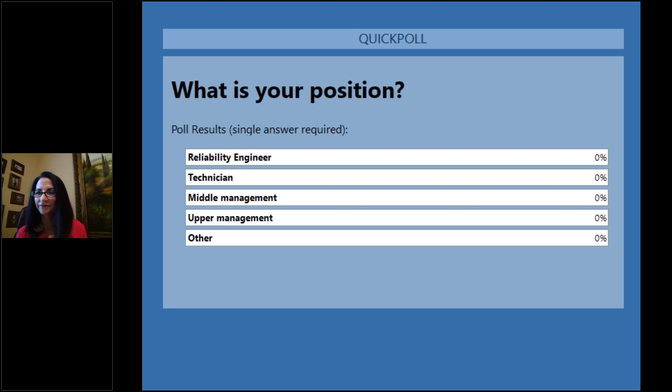And I'm going to share with you one of my other passions other than just reliability-centered maintenance. So I was in Tunica, Mississippi, and I was playing in a no-limit Texas Hold'em poker tournament.

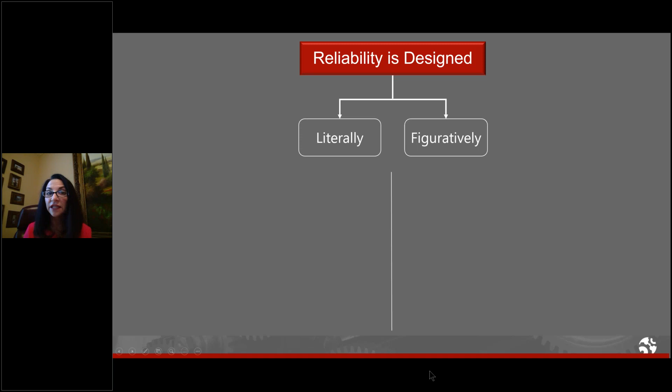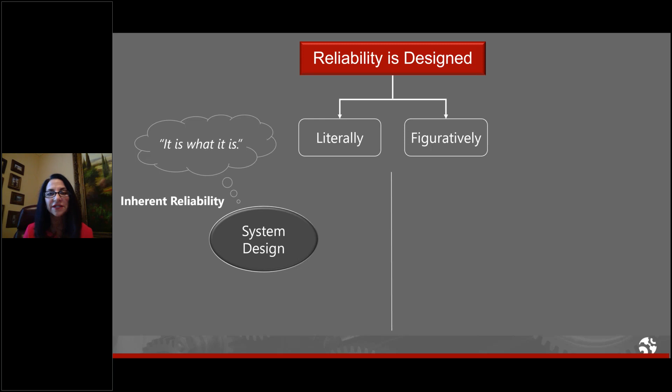Well, when it comes to our physical assets, it works the same way. In fact, we actually design our reliability. So reliability is designed two ways: literally and figuratively speaking. Now, literally speaking, we can't get anything more out of our equipment than what it was designed to do, right? In other words, it's inherent reliability. It is what it is.

But as equipment custodians, we also figuratively design our reliability. So sure, there are things like proactive maintenance. We can decide what kind of proactive maintenance tasks to do on our system, but there's a whole lot more that affects the reliability we get from our equipment. Just things like the operating procedures that we have, the quality of our technical publications and our training programs, the kind of emergency procedures that we have in place, and this is a big one, the operational tempo and the environment in which our equipment works.

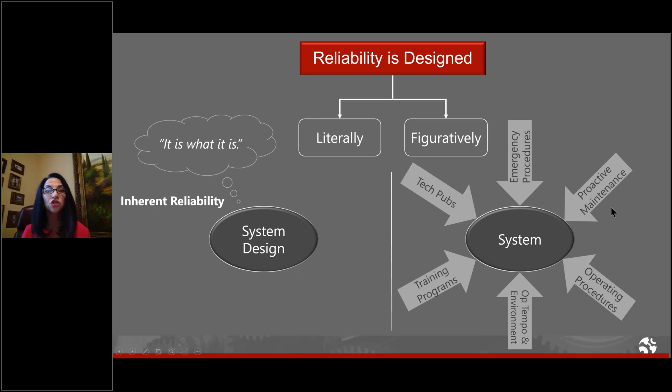See, inherent reliability doesn't mean how long an item will last with no failures. It means the kind of reliability that it exhibits when it's protected by the right proactive maintenance and some other default strategies. So in other words, all these things that we do to and for our equipment are based on the choices that we make.

When we make good choices, we experience good reliability. And when we make bad choices, we experience things like increased cost and chronic downtime and living in reactive mode, running from fire to fire. And then that creates frazzled teams because everyone's running around.

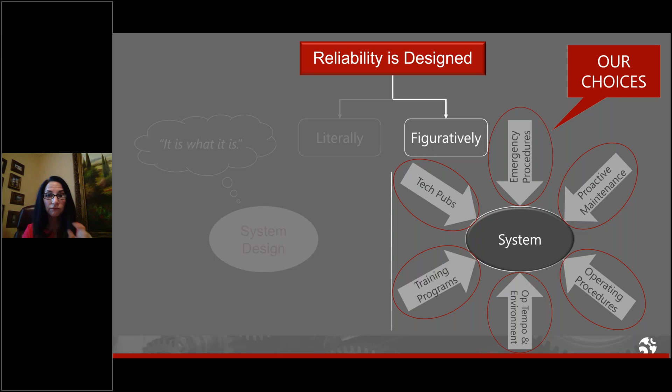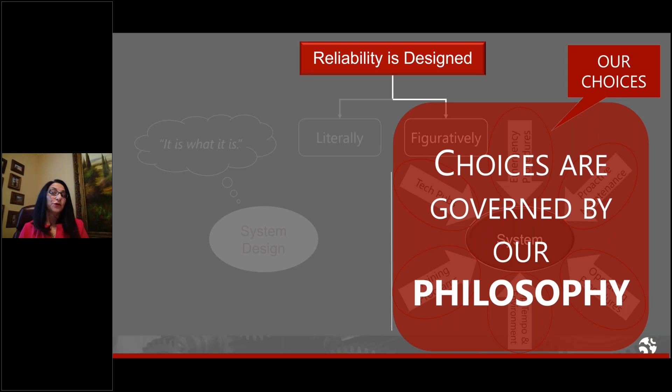Now, the key is that the quality of our choices are governed by our philosophy. So just like the kind of plays I was making at the poker table was completely governed by my philosophy, the same thing goes when it comes to reliability. So then the magical question is, what makes up a winning reliability philosophy? And here's where I want to talk about just 3 of the things today.

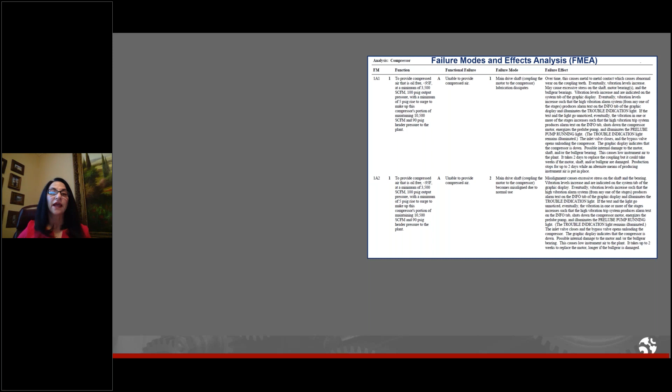And the first one is to begin at the beginning. Now, what do I mean by that? If we were in a live setting, I would ask if you've ever been involved in a failure modes and effects analysis, or if you know what one is. And I'm willing to bet that most everyone online today has been involved with one or knows what one is. And if that's the case, then you know that a failure modes and effects analysis starts by writing functions.

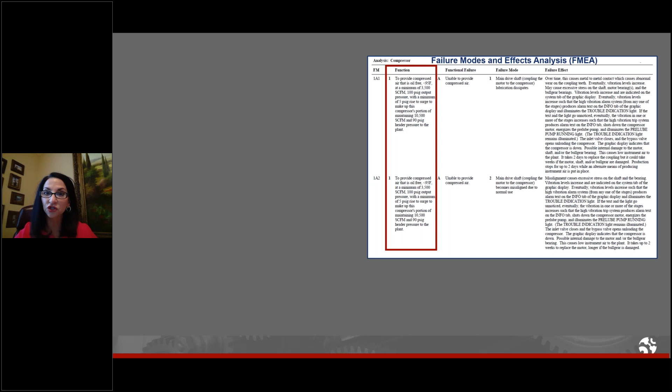Now, here is what my mentor, John Mowbray, taught me about reliability. For me, I like to break things down simply because we could get super complex about reliability, but I like to look at things more basically. I think it's important to start with basics. When you're strong in the basics, it makes your foundation strong, and then everything else follows much more easily.

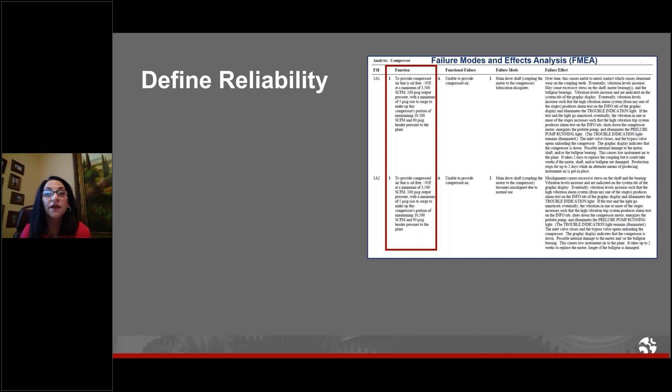So here's what John Mowbray taught me. He taught me that reliability isn't a thing on its own, but rather reliability is sprinkled amongst all of the functions that we need our equipment to do. So in essence, when we write functions properly, we are actually defining the kind of reliability that we need from our equipment. So when we write functions the right way, it's like goal setting for our equipment.

Now, just like human beings, when we wake up in the morning, if we don't have any goals, then we take uncertain steps every day, right?

So for example, and I'll tell you, I'm guilty of not doing this sometimes. In the morning, let's say we wake up and say no matter what, I got to get these 4 things done. I don't know about you, but there is nothing like checking a task off my list. In fact, not only do I check it off, but then I do this with a black Sharpie. It gives me a sense of satisfaction.

Now, I won't try and pretend that I am super disciplined all the time, because I'm not. Sometimes I end up in a big do loop with myself because I don't do this in the morning. And then you know what happens? I get lost in a sea of email and notifications on LinkedIn, and then I look and think, oh, this desk is a mess. If only I got organized, then everything would fall into place. So you can really get lost.

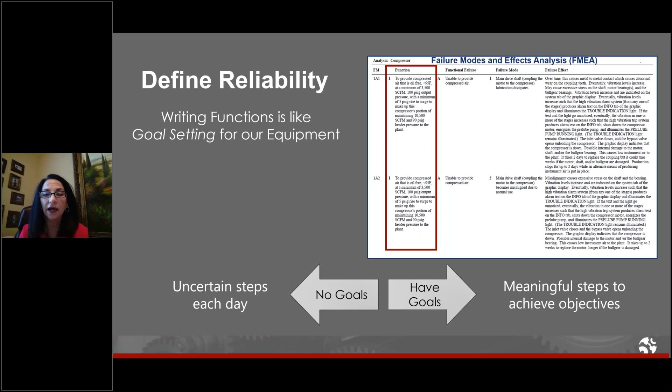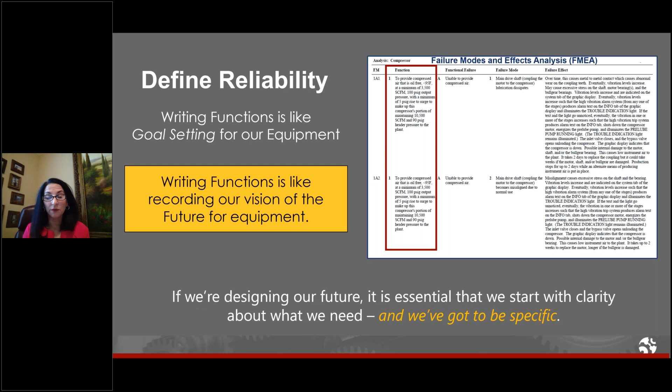And the same thing goes for our equipment. When we have goals for our equipment, when we write our functions properly, when we identify specifically what we need from it, then we are able to identify meaningful steps to achieve those objectives. So really, writing functions for our equipment is like recording our vision of the future for it. Now, if we're going to design our future when it comes to our equipment, it is essential that we start with clarity about what we need, and we've got to be specific.

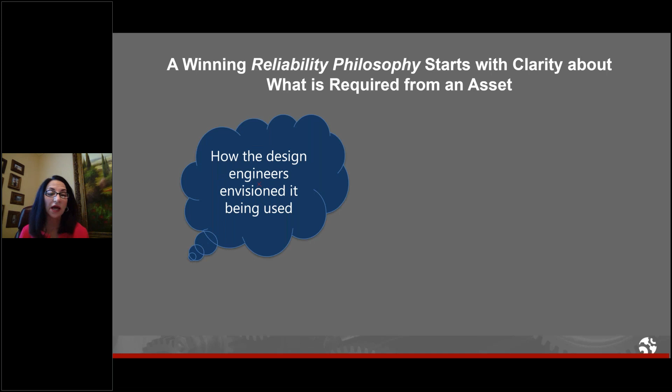So, number 1, a winning reliability philosophy starts with clarity about what we need. And I'm not talking about how the design engineers envisioned it being used, and I'm not talking about how the manufacturer planned on this piece of equipment being used. I'm talking about what the organization that procured it actually requires from it.

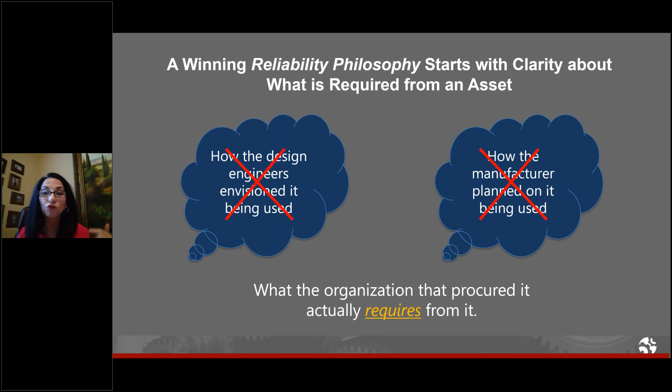Now, for the next 45 seconds, if we were in a court of law, like those law shows where there's a gripping lawsuit in the courtroom, sometimes the attorney will start asking questions, and the other attorney will say, 'I object.' Then the other attorney says, 'Your Honor, will you just give me a little bit of latitude?' So I'm going to ask you for just 45 seconds of latitude here.

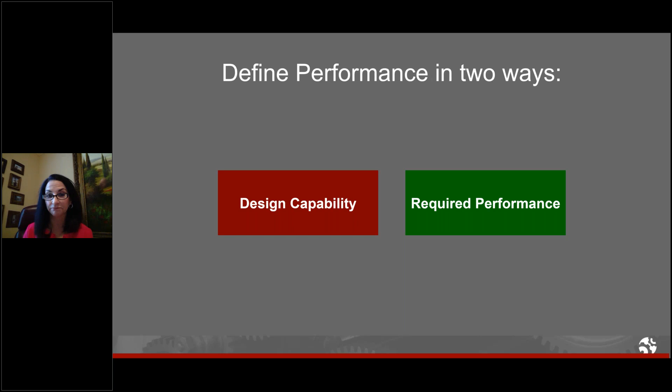So when it comes to our physical assets, we define performance in 2 ways: number 1, design capability, and number 2, required performance. Let's take, for example, a tow tractor—Banu mentioned that I started my career with the US Navy, and my very first RCM analysis was on an aircraft tow tractor. So this is a little bit of nostalgia for me.

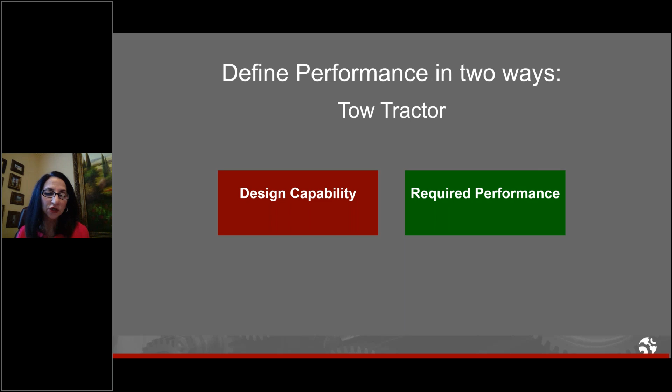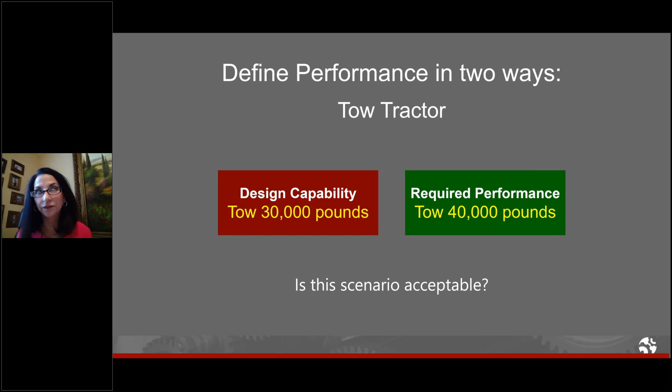So let's take a tow tractor, and let's say it is capable of towing 30,000 pounds, but what I need it to tow is 40,000 pounds. Is this scenario acceptable? Of course it is not, because the required performance exceeds the design capability of the asset. Total common sense.

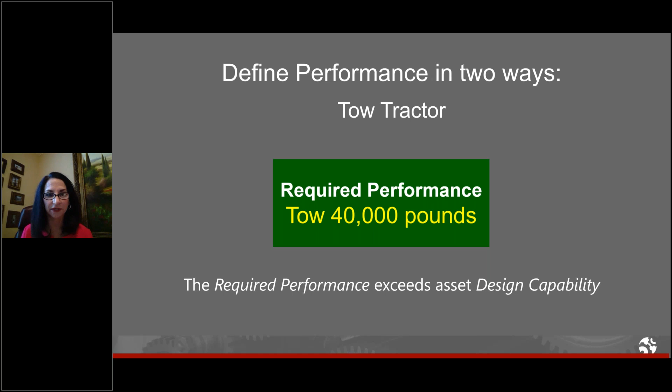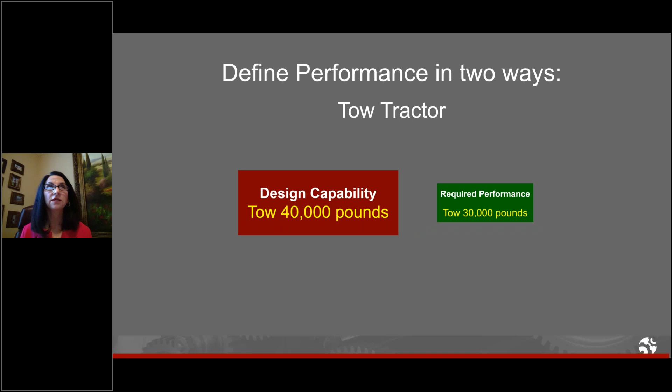Now let's look at it the other way. Let's say what it is capable of is towing 40,000 pounds, but we need to tow 30,000 pounds. Is that okay? Yes, of course it is, because the required performance fits within the design capability of the asset. Now, this is such a straightforward concept.

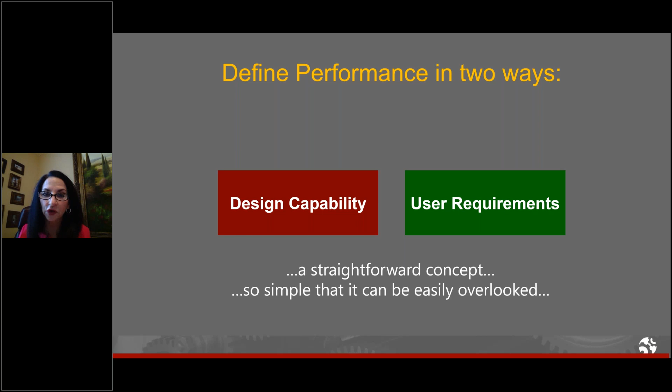It is so simple that it can easily be overlooked. And this is why I asked you for a little bit of latitude. Things that are simple, things that are easy, are also easy to overlook. And in fact, in our world, this has been overlooked a lot of times. If an organization gets this wrong, worst case, it can have very serious consequences, and it can even turn deadly. In fact, it has turned deadly.

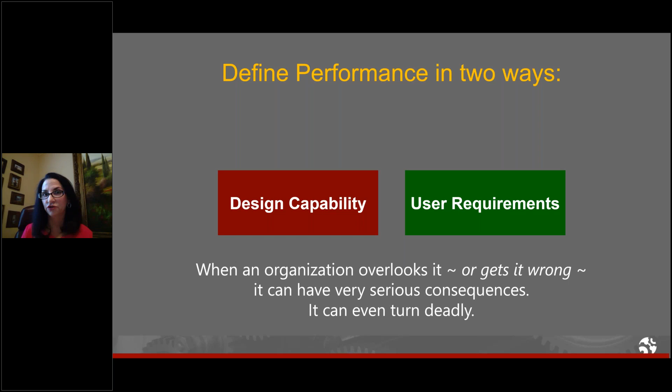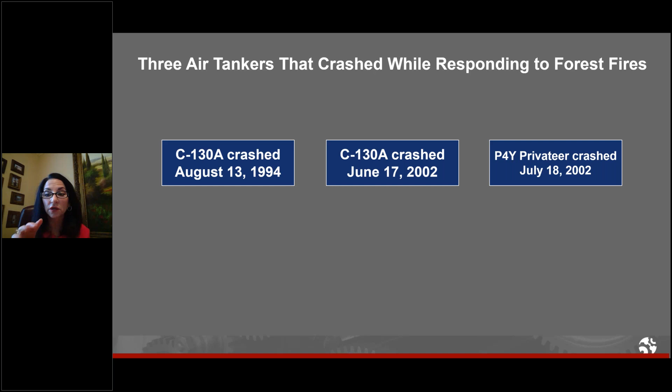I'd like to share 3 examples with you. There were 3 air tanker crashes that crashed while responding to forest fires: 2 C-130s and a P4Y Privateer. These crashes happened in '94 and in 2002. For the first C-130, there was in-flight separation of the right wing. All 3 crew members were killed and the airplane was destroyed.

The second one, same thing—all 3 crew killed and the airplane was destroyed. And on the last crash, there was in-flight separation of the left wing, and both crew members on board were killed and the airplane was destroyed.

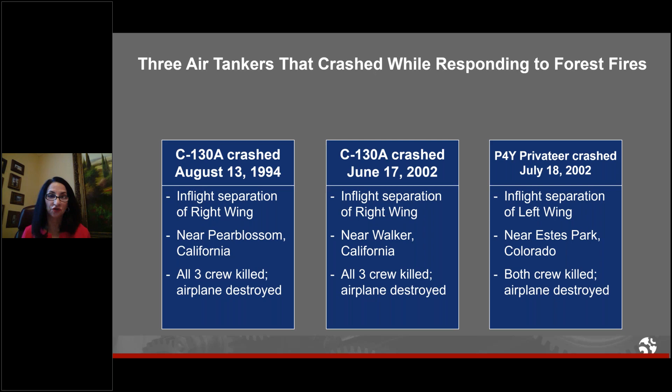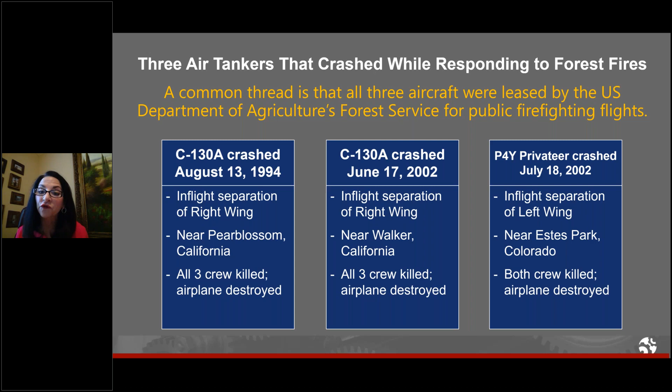Now, there was one common thread that all 3 of these aircraft had: they were leased by the United States Department of Agriculture's Forest Service for public firefighting flights. But here's the thing—the aircraft were originally designed to transport cargo for the US military. They were not designed to fight forest fires, but they were retrofitted to do so.

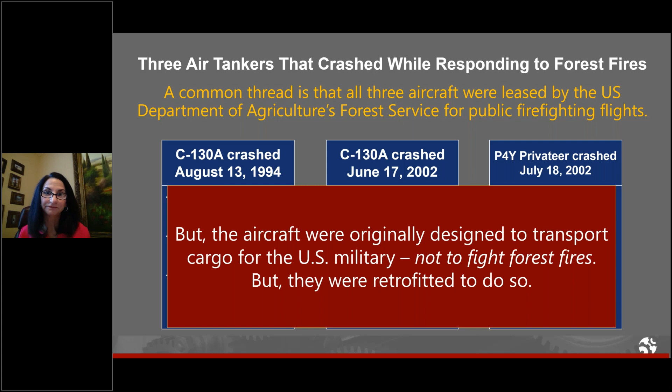Now, remember when we talked about how we design our reliability, it's not just the design of the equipment, and it's not just the kind of proactive maintenance that we do. We've got all of these other things in play, especially operational tempo and the environment.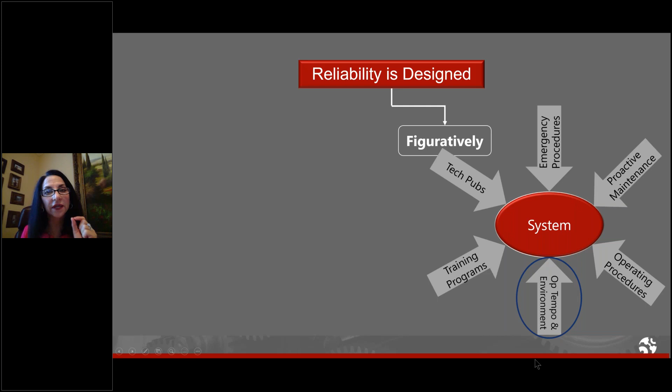Well, when it comes to the operating environment, when you're fighting forest fires, the loads experienced by an aircraft transporting cargo are vastly different.

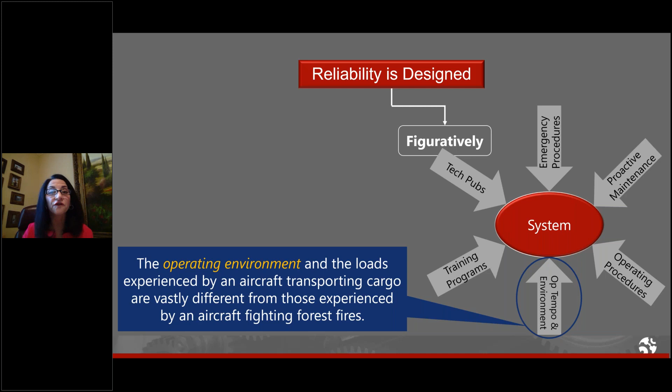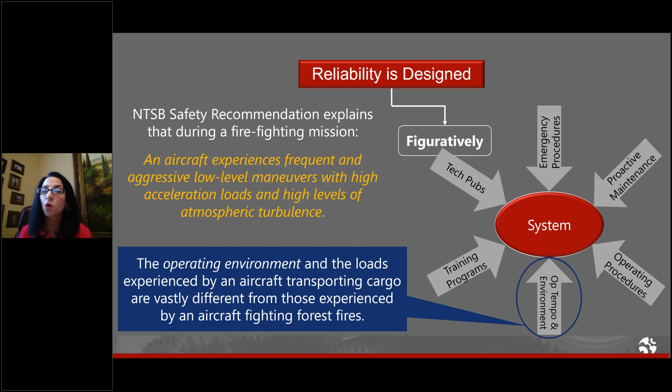The NTSB recommendation as a result of these 3 crashes, this is what it said, this is what it explained about a firefighting mission. First of all, it stated, and what's in yellow is a quote from the report, that an aircraft experiences frequent and aggressive low-level maneuvers with high acceleration loads and high levels of atmospheric turbulence. The structural lives of the aircraft were shortened because of the harsh operating environment and the far more aggressive loads applied to the aircraft during firefighting versus transporting cargo, right?

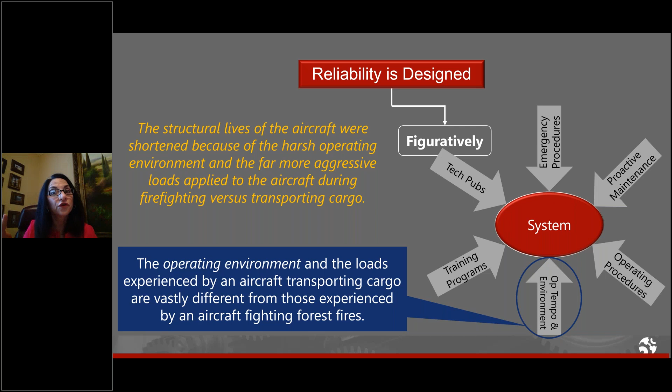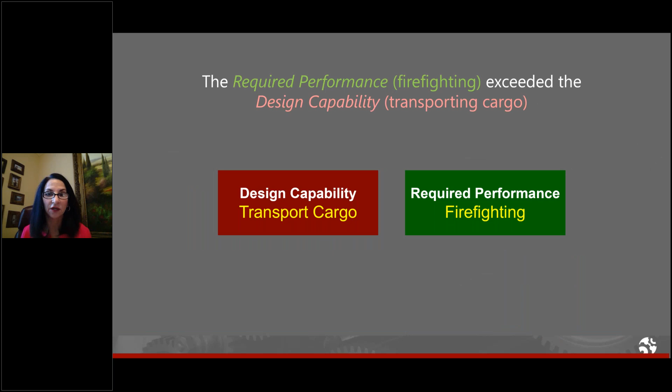So required performance versus what it was designed to actually give us. So the report concluded that the aircraft were likely operating outside the manufacturer's original design intent. So what happened is that the required performance of firefighting exceeded the design capability of transporting cargo.

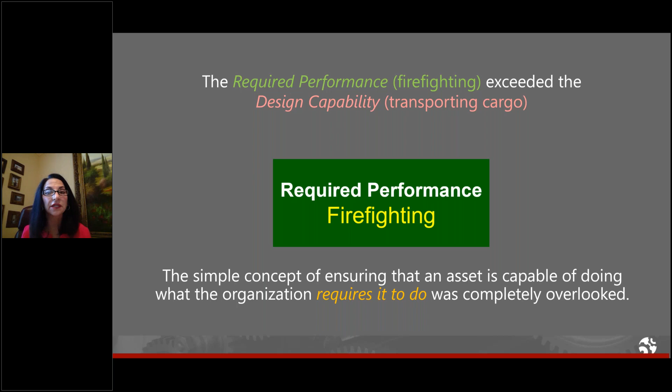That is a very simple concept, and it is so obvious that sometimes the obvious just escapes us. And when a simple concept like this, of ensuring that an asset is capable of doing what we need it to do, is completely overlooked, it can end up in disaster. That is an extreme example of why it's so important to begin at the beginning.

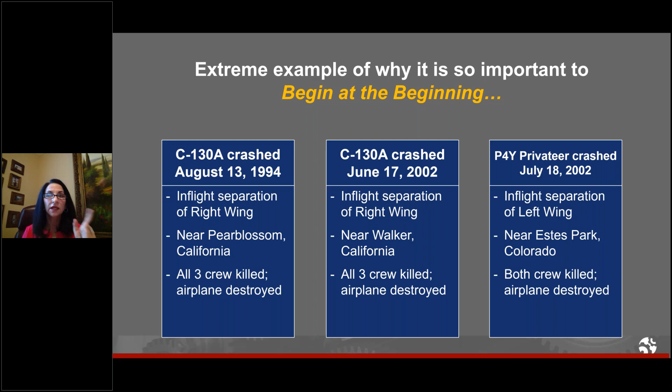Now, even if an organization takes the time to write functions, in my experience it's often done as just a matter of routine, and those functions lack the required details. And it's often because they're not asking the right people.

So I want to give you a real world example. A few years ago, I was hired by a company to review an RCM analysis that they had done on an air compressor. It got very poor results. So they hired me to have a look through it and let them know why I thought they didn't get the results they needed.

So that's what you see, what I'm going to show you on the left-hand side. Now, on the right-hand side, I'm going to show you functions from a real-world air compressor analysis that I analyzed, that we got effective results from. So I can illustrate what I mean by begin at the beginning.

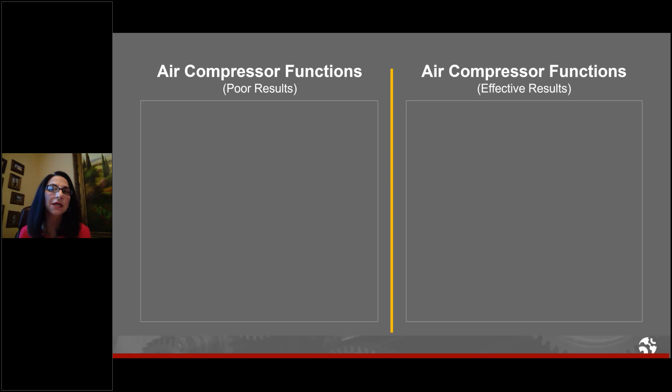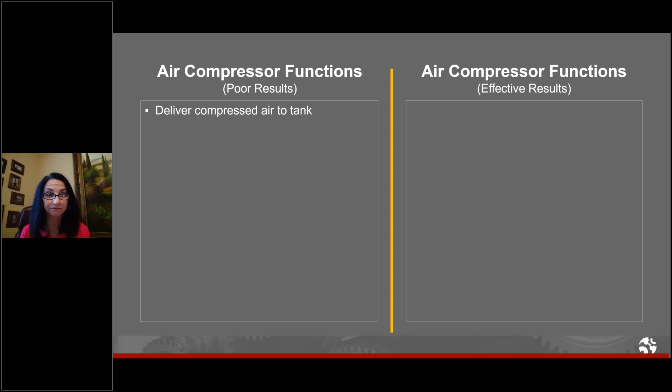Okay, so poor results — these are verbatim functions from this analysis. 'Deliver compressed air to the tank.' Well, the thing about that function is it describes just about every air compressor out there. Another one was 'filter and remove particulates from intake air.' Again, another function that could describe just about any air filter. And 'monitor pressure level' — it's very vague, it lacks detail.

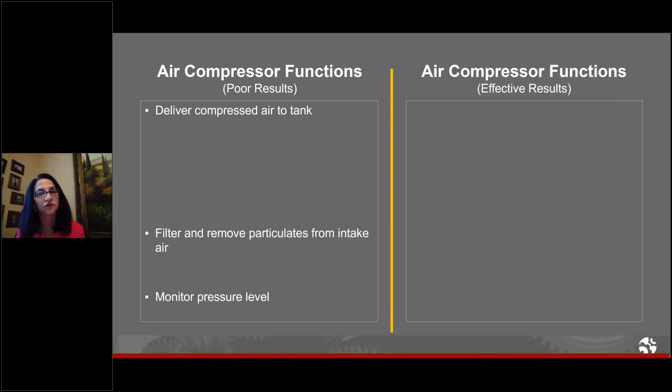Now let me show you some of the functions from an analysis that I facilitated. And this was our primary function: to provide compressed air that is oil-free, less than 95 degrees Fahrenheit, at a minimum of 3,500 standard cubic feet per minute, 100 psig output pressure, with a minimum of 5 psig rise to surge, to make up this compressor's portion of maintaining 11,000 standard cubic feet per minute and 90 psig header pressure to the plant.

So notice in this function that we have been very specific, not about what this compressor was designed to do, but what we need it to do. And you also notice that in this function, we make clear that this compressor makes up part of what is required of the plant air. So it's not the only working compressor — it's very specific based upon what the plant needs.

Okay, the next one: to remove particles greater than or equal to 1 micron from the incoming air to the compressor. So you can see the difference between this vague function and this one that is more specific. And finally, to indicate main pump oil discharge pressure within plus or minus 3 psi. Again, we've been very specific about how well we need our pressure gauge to indicate.

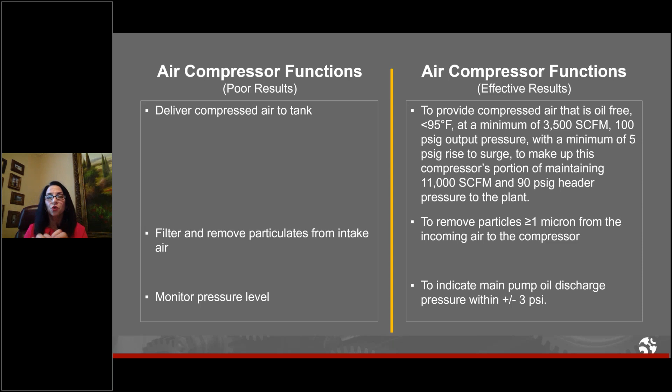So when we take a step back and look at this, on the left-hand side, this is writing functions as a matter of routine. And this is how we define reliability. So the moral of this story is, before we can figure out what kind of proactive maintenance we should be doing, or if we need to make any improvements to our operating procedures or training programs, we need to get clear about what we need from our equipment.

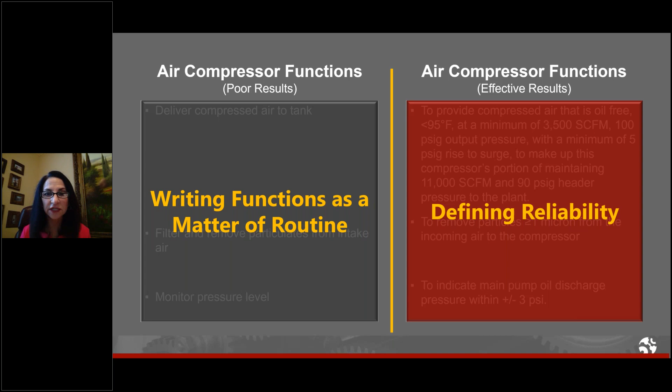Now I'd like to pause just for 30 seconds and let's do another poll. This question is, does your organization have a process to formally consider required performance from your assets? Now, on purpose, I italicized the word formally, because it needs to be more than maybe a couple of people getting together and having a chat about it. So if you could just say yes or no, we'll take another 20 seconds on that poll.

Okay, so far it's almost 50-50. It's 53% no and 47% yes. So for those of you saying no, for the half of you saying no...

In my experience, I have facilitated analyses where, while identifying functions, we figure out the cause of chronic failure. It was actually just a few months ago, I was facilitating an analysis, and about a day and a half into it, we actually stopped doing the analysis because we figured out that they were using the equipment in a way it wasn't meant to be operated. That was the reason for the chronic failure. So we switched gears and figured out what we could do about that. It can be really valuable and really eye-opening.

Okay, let's go on to number 2. We're going to talk about 3 things today. The second one: what makes up a winning reliability philosophy?

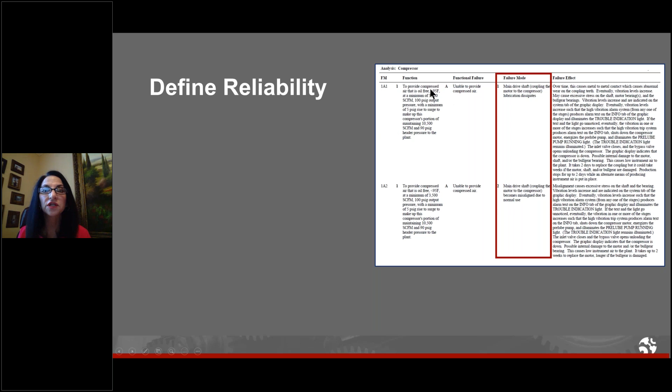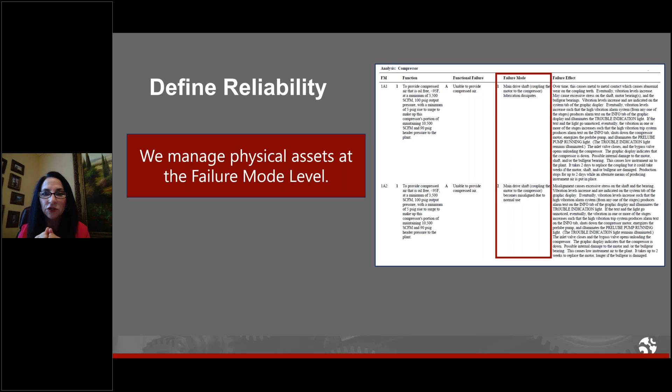Okay, so number 2 is we manage physical assets at the failure mode level. This is another valuable thing my mentor, John Moubray, taught me, and I can hear him saying it because he said it to me so many times: we manage physical assets at the failure mode level. So if that's the case, when we identify failure modes, we have to make sure we write them at the right level, but also in the right amount of specificity, so that we can figure out how to manage them properly.

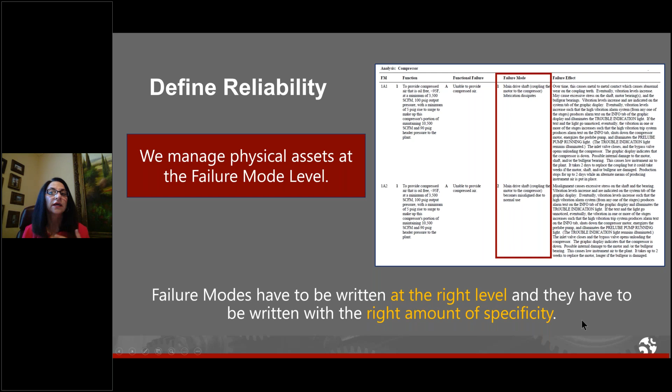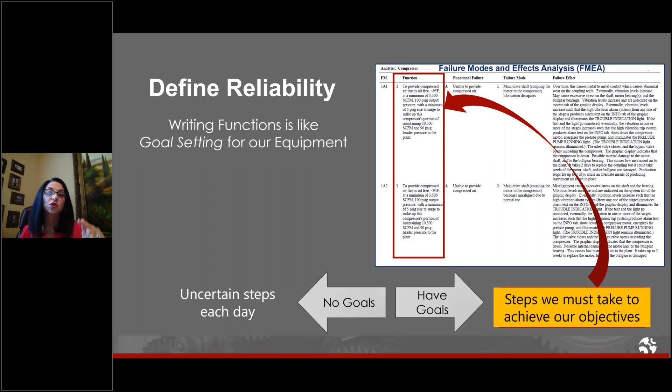Now, remember how we talked about how we take uncertain steps each day, but when we have goals, we're able to know what we need to do to get what we need? Well, that's the same thing - that's why we're writing failure modes. We're writing failure modes so we can figure out what steps we have to take to achieve our objectives.

Now, here's a very simple way of thinking about a failure mode - this is the way I think about it. A failure mode is like a road. And if we were live right now, I'd be walking across to the other side of the room. When you're on the right road - in other words, if you have your failure mode written properly - then you can arrive at your destination, which is proactive maintenance tasks and any other default strategies, like maybe we need to beef up an operating procedure or change a tech manual, or do a failure finding task on one of our protective devices, things like fire systems, those devices intended to keep us safe in the event something else goes wrong. So you see, if we're on the right road here, we get to where we need to go.

But when we don't write them the right way, we end up either writing our failure modes so detailed that we end up with analysis paralysis, or they're so high level that they're so superficial we can't make any meaningful decisions.

So let me show you some real world examples. I want to go back to that analysis, one I reviewed and one I facilitated. On the left-hand side is the analysis where the functions and failure modes were written as a matter of routine. Deliver compressed air to the tank - these were two failure modes: intake filter clogged and intake filter damaged. Okay, those aren't so bad.

Let's compare them to some that were included in this other analysis: intake filter clogged due to normal use, intake filter deteriorates due to normal use, and intake filter damage due to improper installation. You see how these are kind of vague, and I have to almost guess a little what it is I'm going to do about them.

For example, when I write it in this amount of detail, I can decide to monitor the differential pressure and replace the filter as required. For this one, maybe I might decide to replace the filter on a scheduled basis because I know that after a certain amount of time the filter element is going to degrade - it has a useful life associated with it. And with this one, if I get a little more detailed that it's damaged due to improper installation, then I can institute a training procedure, or augment the maintenance instructions to stop that from happening.

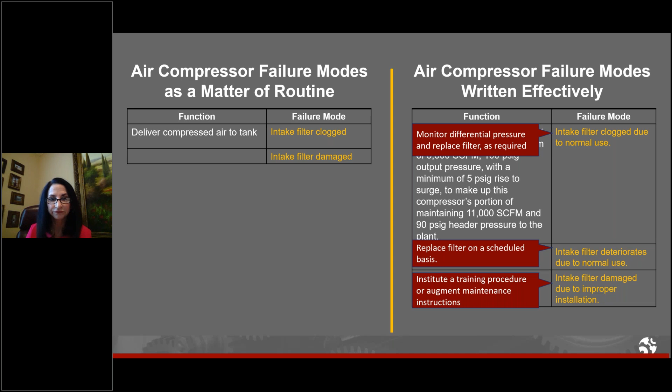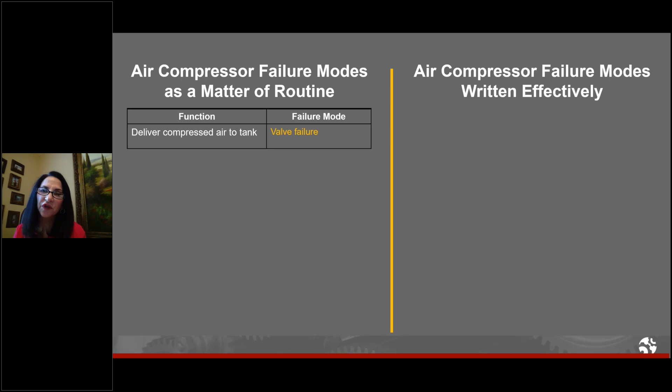Here's another example where the function is still the primary function. This was in the analysis: valve failure. Well, first of all, what valve are we talking about? As a facilitator, I wouldn't ask how did it fail or why did it fail. The question you want to ask your team members is: what specifically caused the valve to fail? That really helps your team members zero in on the question you're asking. What specifically caused it to fail?

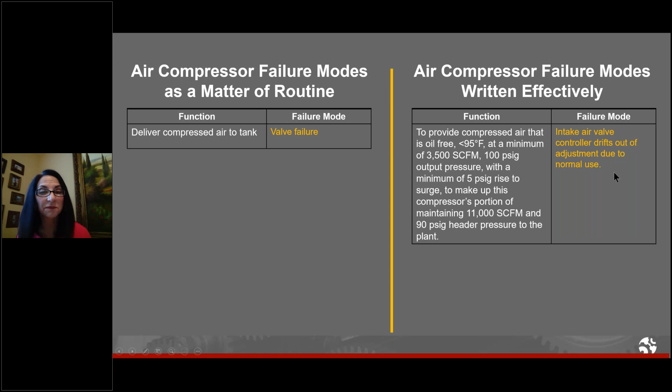Well, how about the intake air valve controller drifts out of adjustment due to normal use? If that's the case, I may decide to calibrate the valve at a specified interval.

So you see, when we get more detailed, we're able to identify what we want to do to manage that failure mode. And that's all those things that are coming in at our system. This is how we design our reliability - we either make good decisions or poor decisions for our equipment.

Let's look at one more real world example. AC motor seizes due to excessive vibration, overheating, and electrical failure. Okay, so we got a whole lot of stuff going on there. We've got some failure effects and more than one failure mode in one. This is going to make your team go in all sorts of directions.

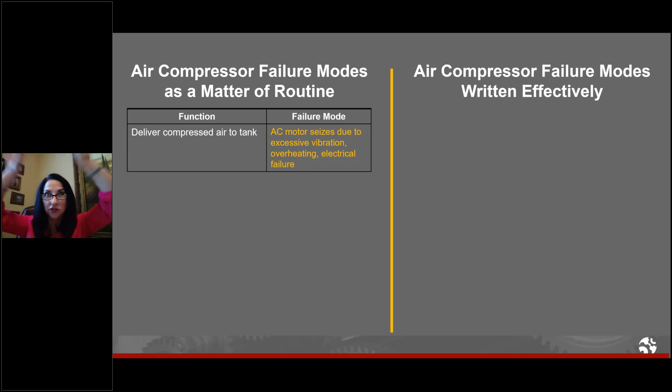So we need to be a little more focused. What specifically causes the AC motor to seize? Maybe the motor bearing oil deteriorates due to normal use - so maybe I might decide to replace it on a regular basis. Maybe the intake screen clogs due to normal use - so maybe I might want to clean it on a regular basis, or do condition-based maintenance and monitor the differential pressure and only clean it when it needs it.

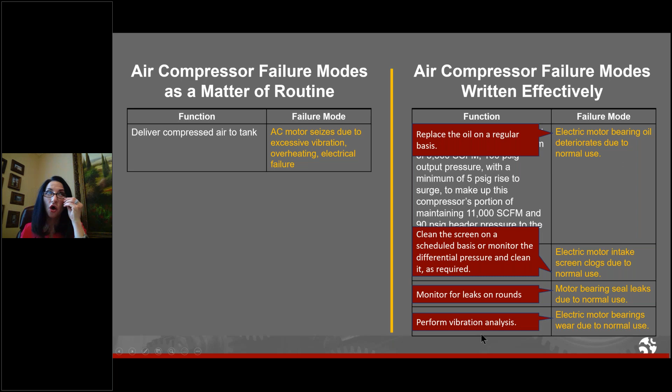For motor bearing seal leaks due to normal use, well, in this case there's probably nothing we can do to predict or prevent it leaking, but we can monitor for leaks on rounds, for example, and catch it in enough time before it becomes a big problem. If the electric motor bearings wear due to normal use, well, maybe I might want to do some vibration analysis on a specified interval, but based upon the right technical characteristics.

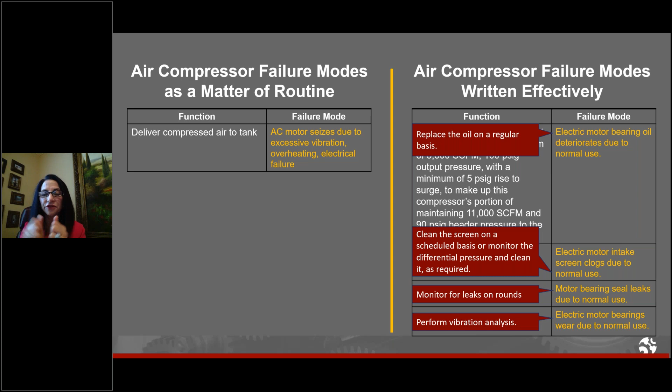Okay, so that's it for number 2. Now let's go into number 3. What is the third thing that we're going to talk about today that makes up a winning reliability philosophy?

So if we go back to our failure modes and effects analysis, one thing I didn't mention is that this is a functional FMEA as opposed to a design FMEA. So if you're doing an FMEA in the design stage, you may be down at the nut and bolt level, and that may be necessary for a different application.

So if we're doing an analysis to come up with good proactive maintenance and other default strategies, I would do a functional FMEA, and that's what you see here. Now, one of the pieces of gold that you can do is to write a failure effect properly. So you have all the different elements.

So when we get to the back end of an analysis, we're in a position of strength to try and figure out how to manage it. So we do all this upfront work first, and then we're ready to make decisions.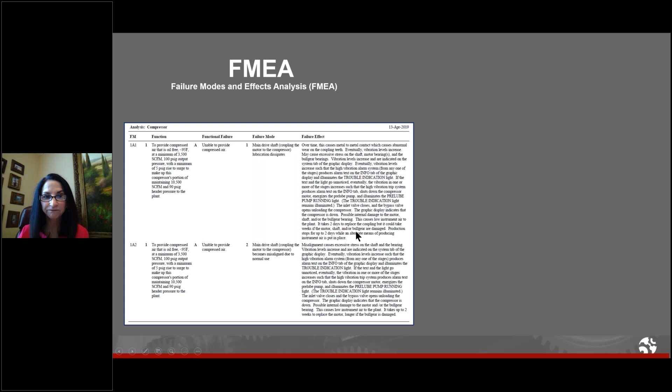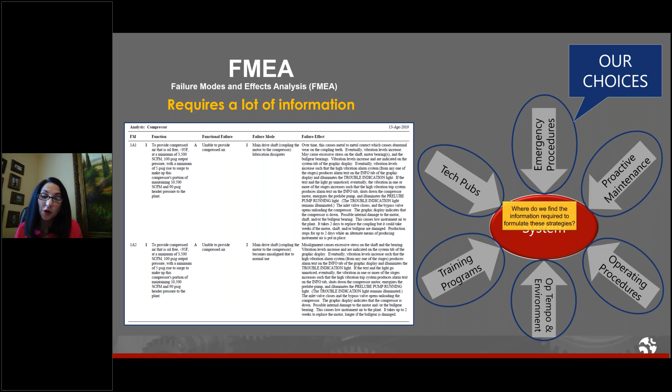But the thing is, doing a failure modes and effects analysis properly requires a lot of information. So it begs the question, where do we find the information required to formulate all of these strategies? I have yet to come upon an organization that has all of the historical data that they need to do a complete reliability analysis. There are always holes, because we live in the real world, not fantasy land.

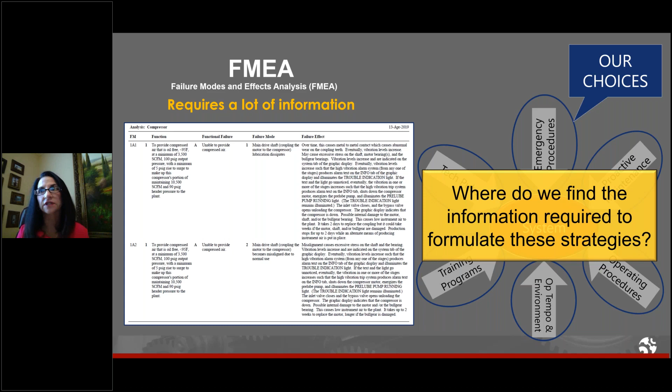So if we go back and take into consideration these aircraft crashes, I want to talk about what happens after an aircraft crash, because it gives us the way forward to properly do an improvement initiative when it comes to reliability.

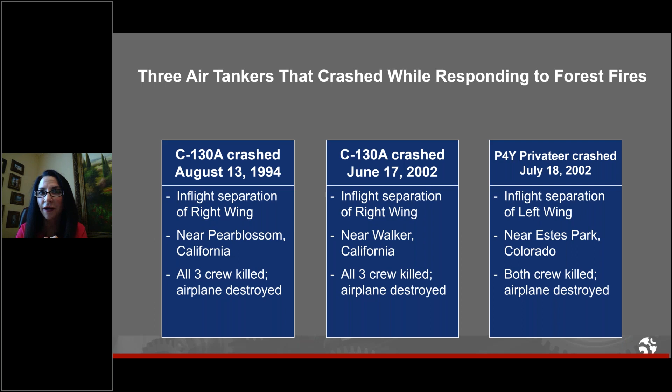In the United States, when there is an aircraft crash, they immediately dispatch what's called a GO team. On this GO team, there are specialists in all of the specific areas of the aircraft that crashed, right? They have operations, structures, systems, power plants, weather, air traffic control, survival factors, someone from the FAA, the aircraft manufacturer, the engine manufacturer, and so on. Some GO teams have up to 35 or 40 disciplines on it.

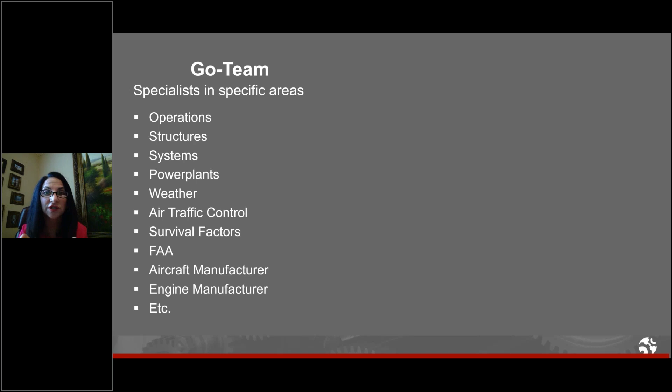Now, one of the deadliest aircraft crashes in United States history, I pulled out some quotes from a couple of the people involved in that crash investigation, because they give us not just the clues, but basically tell us what we need to do to take care of our equipment properly, or where we find the information we need. This first one, his name is Gregory Feith, a former NTSB lead investigator. He said a GO team is a natural system of checks and balances.

You get a lot of information. You have everybody looking at everybody else. They would provide information that you may not normally get if you were trying to do the investigation by yourself.

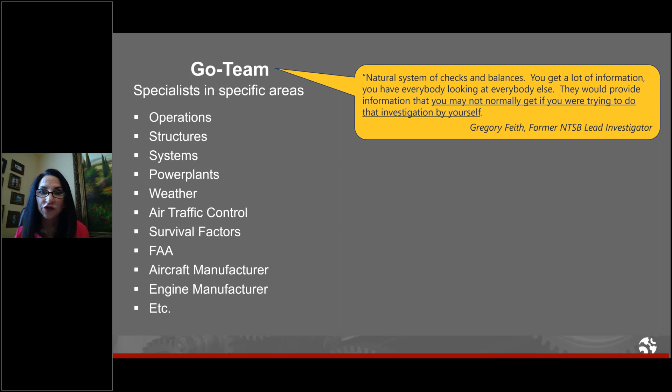Now, another guy who happened to be a journalist said the airline, of course, they're part of the GO team. The engine manufacturer, they're part of the GO team. Every subcontractor, they're part of the GO team. They allow these people to be on GO teams for an understandable reason, because they're the people who understand the mechanics, the physics, the chemistry of the individual items. They can actually be helpful in an investigation.

Now, the reason is because all of these people have all different perspectives, right? If you take an operator, a maintainer, a design engineer, and a systems engineer, each one of those people has very important knowledge about a piece of equipment, but their knowledge comes from only their perspective. So they can give us information based upon their experience and their knowledge, but it's going to be different than a different discipline's perspective.

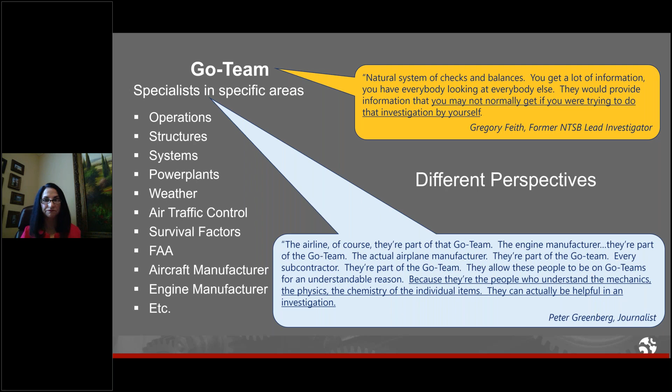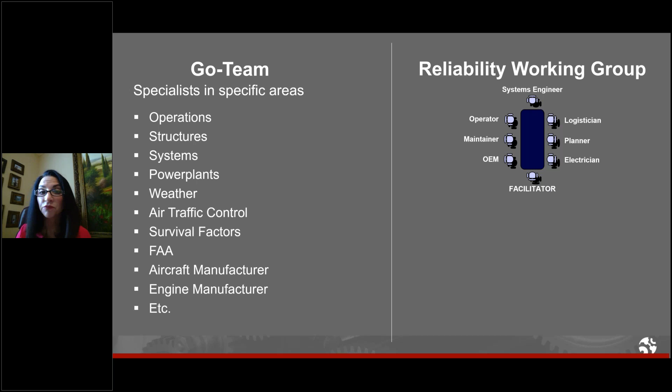So when it comes to a GO team from an aircraft crash, and a working group for any reliability improvement effort you might want to do, if you're going to do a team approach, the question is, what is the key difference between a crash investigation and a reliability analysis? And for the most part, the answer is that a GO team is reactive, and when we do improvement initiatives, those initiatives are proactive.

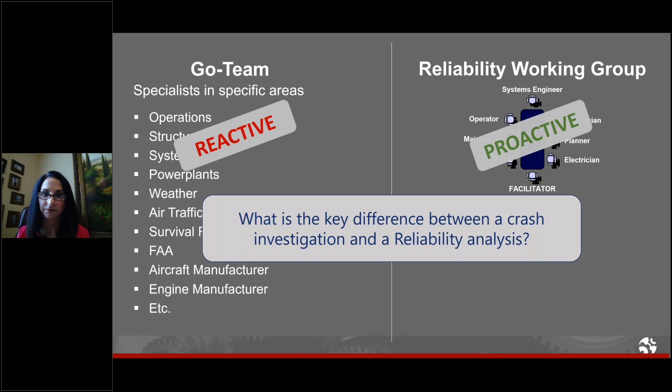Now, I want to share one more quote with you, and this one came from that Gregory Feith, the former NTSB lead investigator. Here's what he said: the best way to characterize any aircraft that has in-service use is that it's like wine, they get better with age. Why? Because we get a better understanding of the airplane.

We identify the deficiencies. We correct them. So over that period of time, the plane becomes better.

Now let's step back for a second, because you may be saying to yourself, why does she keep talking about airplanes? Maybe you're responsible for compressors, or a plant, or an offshore oil platform, or a fleet of mobile vehicles. It doesn't matter, because if we replace the words aircraft, airplane, and plane with asset, it applies to us. So it's all about that understanding, not just about the technical characteristics of the equipment, but also how it behaves in the operating environment and our operational tempo.

So to sum it all up, the last thing I wanted to talk about, one of the ways you can start to take control of your equipment instead of it controlling you, is to get the people who know the equipment best involved in improvement initiatives, whether formal or informal, even if it's just querying operators and maintainers. Anything would be better than nothing.

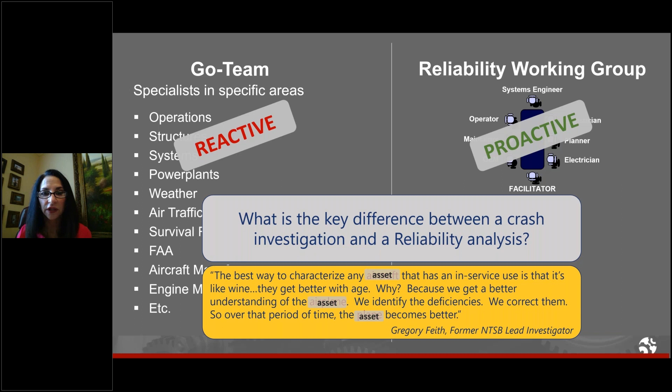Okay, so the last poll before we wrap up and get to questions: does your organization formally involve a multidisciplinary team of equipment experts when making decisions about your assets? My question is not just like walking around and asking questions, but do you actually have a formal process instituted where everyone takes part?

Okay, so far it's trending 70% no, and now we're at 60% no and 40% yes. That's actually higher than some of the other polls I've taken just from people raising hands when they're in the audience. And if you're one of those people who said no, definitely don't feel badly or think, oh my gosh, I'm not doing anything right, because it's more the exception.

It's more the norm rather than the exception, because these things take time. Like we had a poll at the beginning, a lot of times it goes for our own personal lives as well as when we're out working. There's a lot of stuff that goes on, right? There's a lot of unplanned failures that happen and things that come up. We're in the midst of one right now, this coronavirus. And sometimes we just have to do what we have to do. But if we really want to take control of our equipment, we have to make getting proactive a priority.

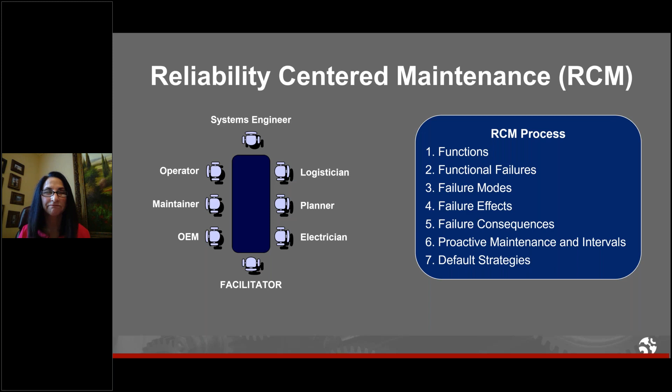Now, a couple of final thoughts here. Some of the misconceptions, there are a lot of misconceptions about RCM. One is that it takes too long and it's too expensive to do.

And yes, it takes time and it takes resources, but when it's done right with the right people, the results can be transformative, and you can efficiently complete analyses.

Another misconception is that you have to do RCM on all of your equipment, and that's just not true either. You can do RCM as broadly or as narrowly as you want. You could do it on an entire plant, although I don't know that there would be enough time to do it on everything. You could do it on just an air dryer system, just the compressor, just an electric motor, or just a few failure modes.

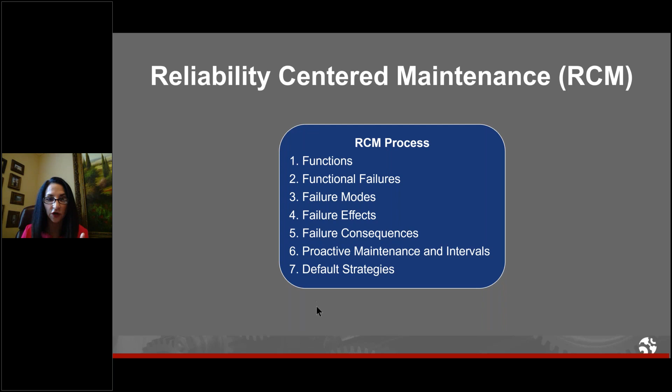But the other three things are these. A FMEA, or failure modes and effects analysis, is embodied in the RCM process - that's steps 1 through 4. When you throw in step 5, failure consequences, now you have a FMECA, or failure modes, effects, and criticality analysis. And a question that I get asked very frequently is, how do I know if I should do RCM or CBM, condition-based maintenance?

But here's the thing. Condition-based maintenance is embodied in the RCM process. It's embodied in step 6, proactive maintenance and intervals.

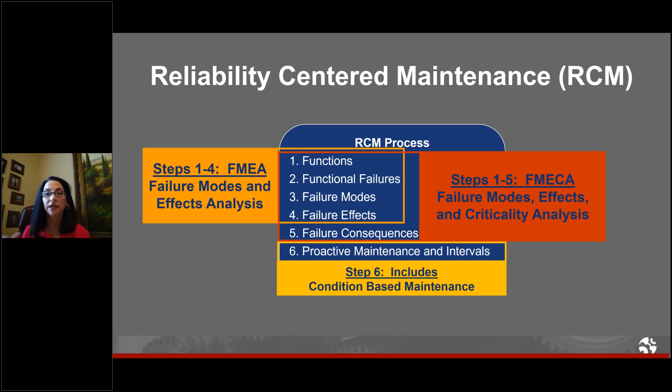So just to sum everything up, we talked about three things today that help us to take control of our equipment instead of it controlling us. Number 1, get clear about what we need from our equipment, not what it was designed to do, but what we need from it. Number 2, specifically identify what would cause us not to get that kind of reliability that we need from our equipment, because that puts us in a position of strength to decide what to do about each of those failure causes.

And number 3, use your equipment experts within your organization. They are most often the most truthful source of data. So that sums up what we talked about.